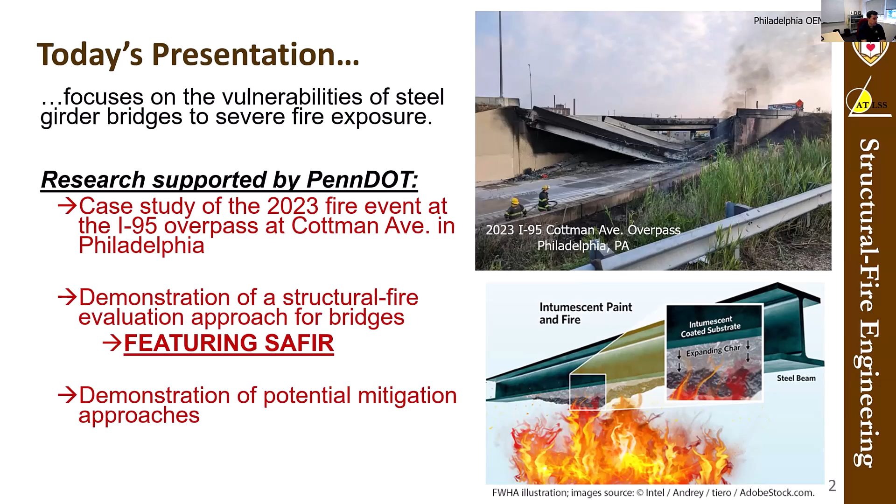So the presentation, we're going to focus on steel girder bridges under severe fire exposure. This work has been supported by PennDOT and features a lot of SAFIR. We're always very appreciative of the capabilities that SAFIR can provide us with doing these analyses, and we've been coupling that with some of our own fire modeling capabilities and calculations, looking in particular at potential mitigation for how we can make it better under these kinds of fires.

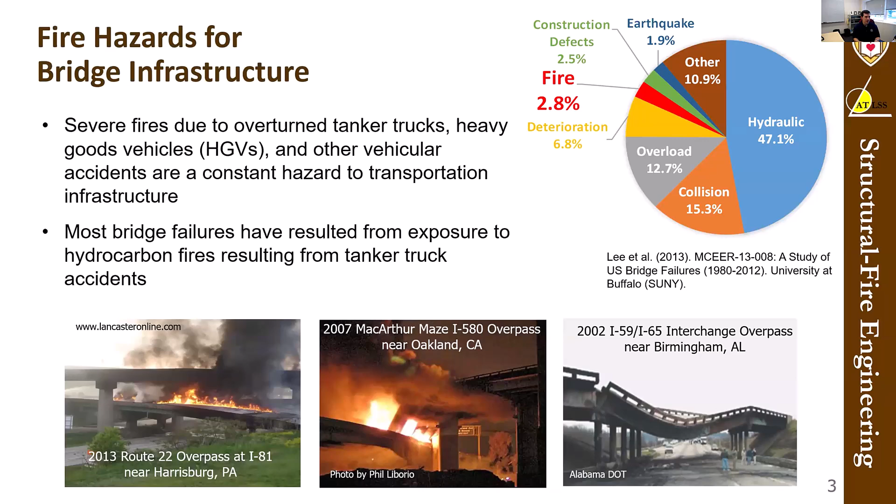Fires for bridges has become an increasing area of concern. The U.S. Federal Highway Administration has been starting to fund work in this area. There's not a whole lot of guidance currently out there in terms of AASHTO or the state DOTs, but fire, even though it's a small sliver in red right there, makes bridges fail on an annualized basis comparable to construction defects and earthquakes. We do a lot more in terms of inspection and design for both of those, and that's a relatively small percentage, but it's a high consequence event. Hydraulic, collision, overload are obviously much bigger, but fire is comparable to some of the other ones that we spend a lot more time on. So entities like PennDOT have become a lot more concerned as it's been happening more and more.

So the I-95 Cottman Avenue bridge in Philadelphia is just over 100 feet in span. The clearance is just over 14.5 feet, so a relatively low clearance bridge. It was only 12 years old at the time of the event last year. It was subjected to a tanker truck fire, the truck was carrying an estimated 8,500 gallons of gasoline. The bridge failed in just a little over 10 minutes due to the extreme exposure, and then the fire continued for about an hour before they got it under control.

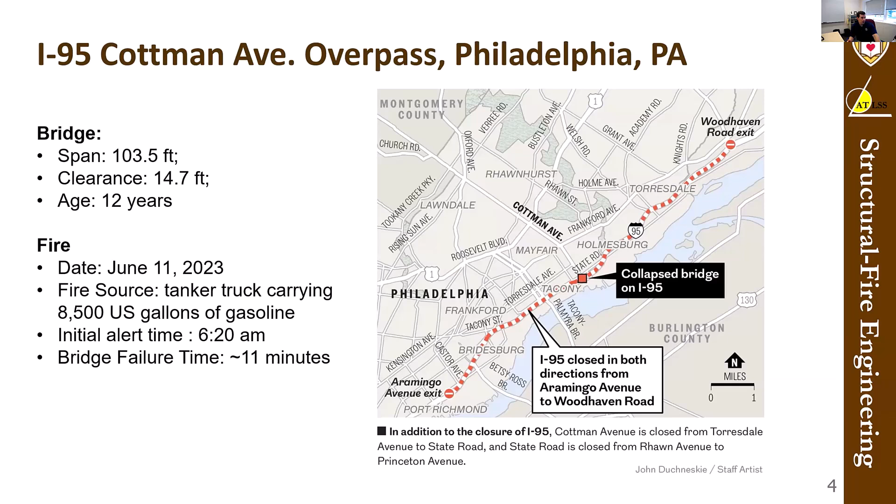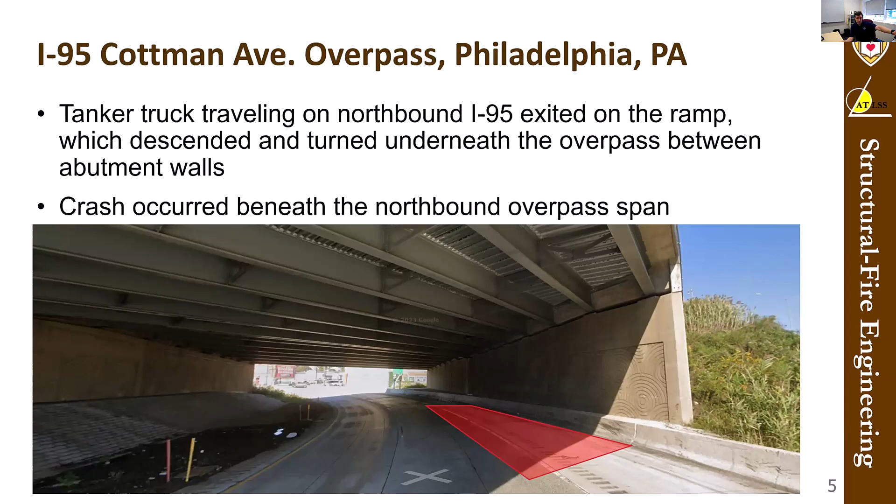So we have an image here showing approximately where the truck crashed. The truck was exiting I-95 and descending down an off-ramp, and that off-ramp curves and goes underneath the overpass to right here, where the driver lost control and struck the abutment wall. The truck overturned, and due to the crash, right underneath the northbound span, that's where the fire ignited. The southbound span was adjacent to this. Northbound collapsed, southbound did not, as you can see here. But southbound was sagging and damaged enough where they ended up demolishing both spans anyway.

The estimated heat release rate for this kind of truck fire would be approximately 300 megawatts. That's a number that's been established by the National Fire Protection Association, available in their guidance. It's a relatively typical steel girder highway overpass, so this was not a design that had a lot of uniqueness or uncommon pieces to it. This was a very straightforward design in the PennDOT inventory, and they were kind enough to provide us with all the drawings so we could do all the appropriate modeling of the sections and the slab and everything else.

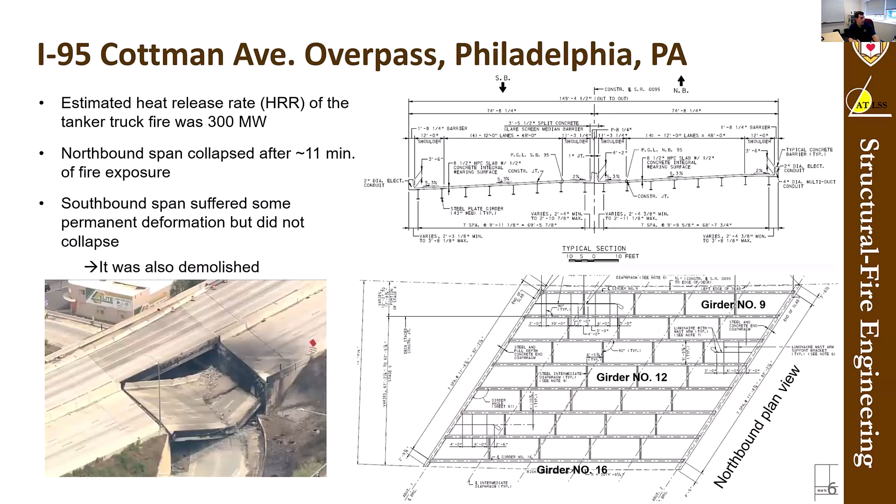So where do you get started with these bridge fire projects?

Chapter 6 in NFPA 502 has some guidance, but the really big thing right away is that it applies to bridges with spans over 300 feet, to support firefighter accessibility, minimize economic impact, and mitigate structural damage. Something like a cable stay bridge, like the Cuomo Bridge, falls into that category. These more signature structures fall into that category, but the provisions in NFPA 502 are not necessarily required for spans that are less than that.

Most of the bridges that have been adversely impacted, that we showed earlier, are mostly just typical overpasses in high traffic areas with high levels of vulnerability.

So the engineering analysis—if you were to apply the NFPA 502 requirements, an engineering analysis is needed to determine if the bridge could withstand a fire without collapsing. It gives you some guidance depending on what the bridge is going over for what kind of hazard you should use, but the engineering analysis itself is not specified.

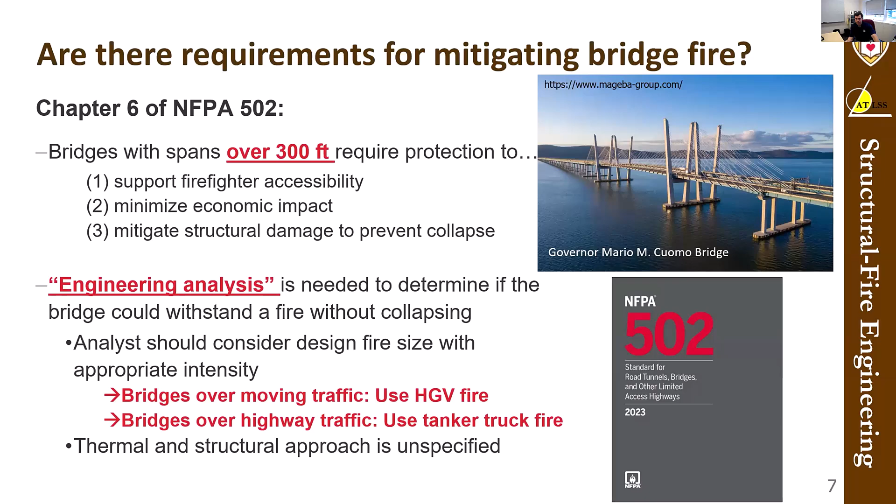So we've been using SAFIR in combination with our fire modeling tools to do this type of work for PennDOT, using performance-based structural fire engineering: fire model, heat transfer model, structural model. With SAFIR featured prominently in the heat transfer and structural models, we've been trying to synthesize these approaches that take reasonable representations of fire, bring the heat to the structure, and then see what the structural response is—so PennDOT can begin to make decisions about what kind of thermal and structural vulnerability we have, how to select products to protect these assets, and what the potential outcome is.

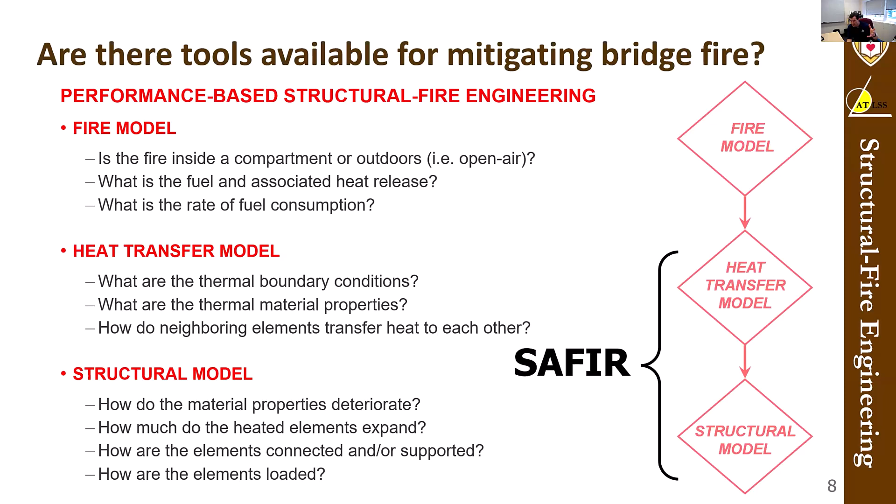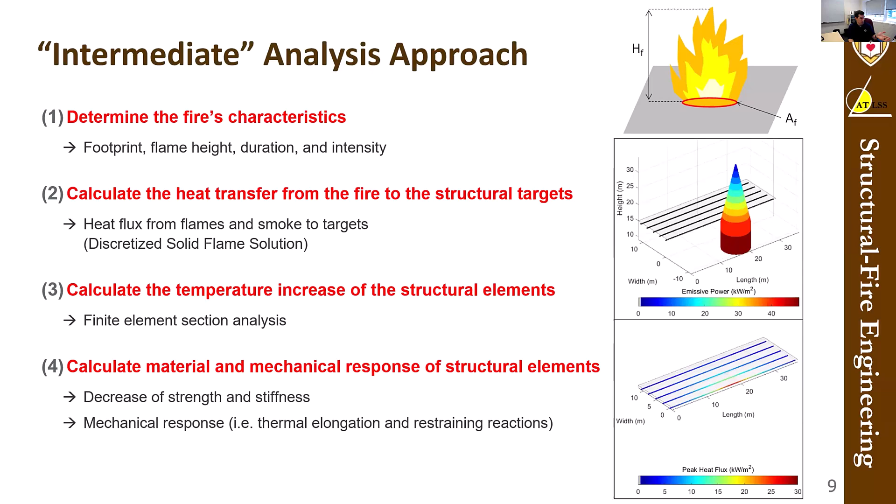Even if we apply passive protection, what should we be expecting from a damage perspective? The approach we've been applying is somewhat intermediate—that's the term PennDOT has liked. We're not using the highest order of computational approaches, but we're also not using single calculation spreadsheets. It's trying to go in the middle between certain levels of complexity to determine the fire characteristics, calculate the heat transfer from the fire to the structural targets, calculate the temperature increase of those elements, and then calculate material and mechanical response of the structure.

So we'll go through each of those steps as it applies to I-95. The fire characteristics: establishing that this was a tanker truck, we have an established heat release rate based on NFPA 502. But then we also look at the footprint of the fire, how long it takes to burn away the fuel, how much of that 8,500 gallons would be available. You'll have some runoff, some absorption—what would be a reasonable approximation to determine the length of time. You get a heat release rate time history from all of that, and also fire geometry, particularly the flame height and the breadth of the fire.

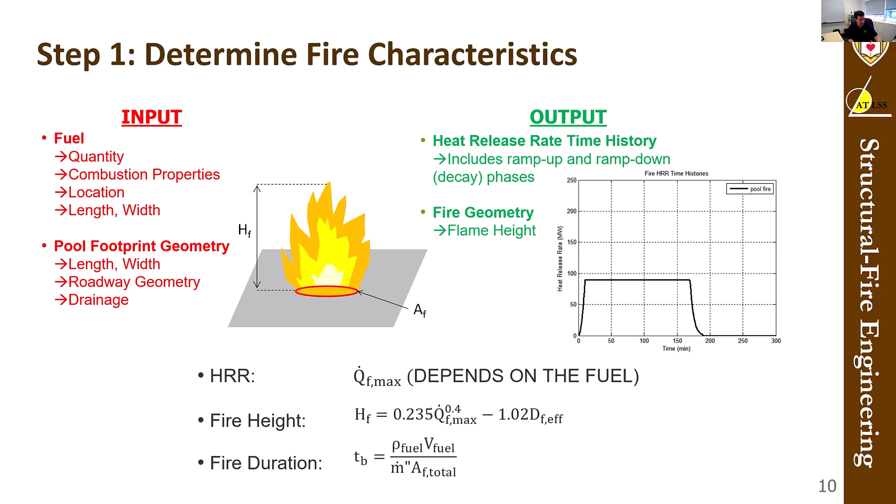For a hydrocarbon pool fire, there are established equations for determining flame heights and heat release rates based on the fuel. For solid fuel fires, we've done a few using inventory methods for PennDOT as well—that's been in response to other events where bridges collapsed due to burning storage materials underneath the bridge. For vehicular fires, instead of doing a hydrocarbon pool calculation, you can revert to the heat release rate tables from NFPA, and use those as the basis for calculating flame heights based on the footprint you have.

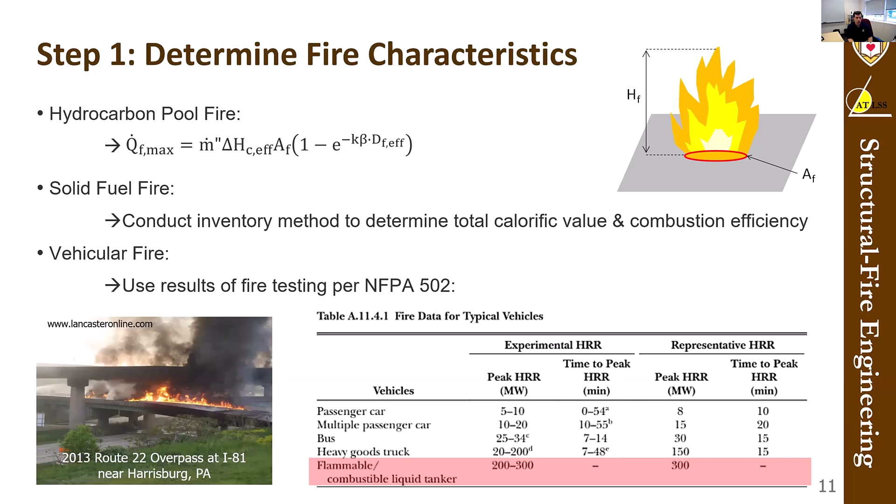With those things in mind—to establish how long the fire would burn, how high the flames would go, and the overall breadth of exposure—we then use a model we've coined the MDSF, or the Modified Discretized Solid Flame model. We've progressed through several iterations, and this is really the second edition. We used it on the MacArthur Maze fire, which happened more than 15 years ago in Oakland, California.

We've used this looking at the Harrisburg fire incident from 2013, and then also the I-85 in Atlanta from several years ago as well.

It basically takes the solid flame, the fire object, and discretizes its surfaces into tiles, and you can begin to divide them up into visible flame and smoke obscured elements. You have the flames underneath, and then also a luminous zone, which can fully have visibility of the structural objects. Then the smoke cone sits on top, and that helps shield some of the emissivity coming off of the flame.

Then you can calculate the total heat flux, the contribution of all tiles that can see a target, on any object adjacent to the fire. If the bridge ends up confining the fire and smashing its top, you can then begin to spread it out.

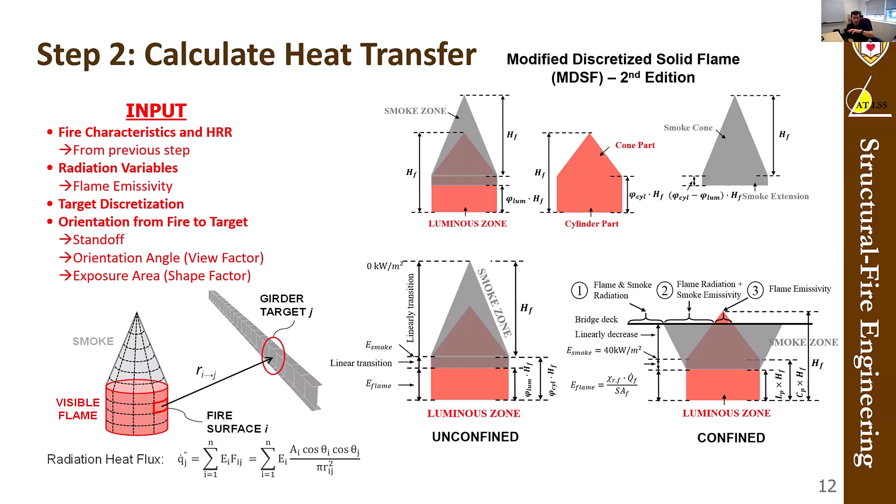So we do both when we look at particular types of exposure. If we have a fire — again, this was not the case for I-95 — but if it's just adjacent to the bridge, the fire goes up and you have tapering down of emissive power as you go higher in the smoke cone.

We validated this model against numerous experiments, especially for hydrocarbon pool fires, and then also using FDS models for further verification. You get a spatial distribution of the heat flux exposure and the time history, so for how long this would take to burn out.

If you switch over to confined fires, the smoke and flames smash into the underside and spread out, and then you see a much more severe distribution of peak heat fluxes, depending on how close you are — your proximity to the fire and the clearance.

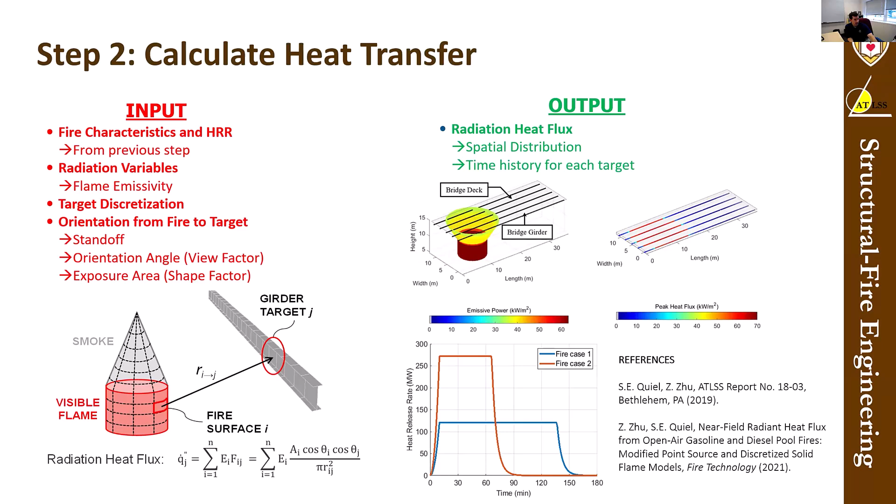So for I-95, the truck hit the abutment wall on the north side of that off ramp underneath the northbound span, and then caught fire, with a heat release rate of 300 megawatts.

So this fire, the way the MDSF is working, is severely smashed underneath because that's going to have a high flame height, approximately a 50-foot length. We use an elliptical shape rather than circular, and we have some strategies for how that creates the cone shapes — we can kind of mold it to get more of a lengthwise fire.

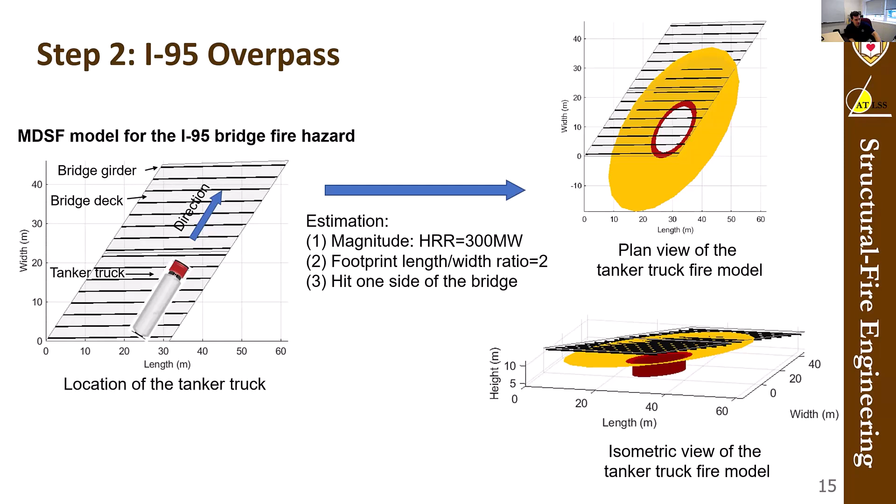Looking at the isometric view for how this tapers around with the smoke, those edges that are smashed kind of go into the abutment wall or outside the bridge. It's assuming those are going to be escaping vertically. So the entire shape is smashed, if any of it is smashed.

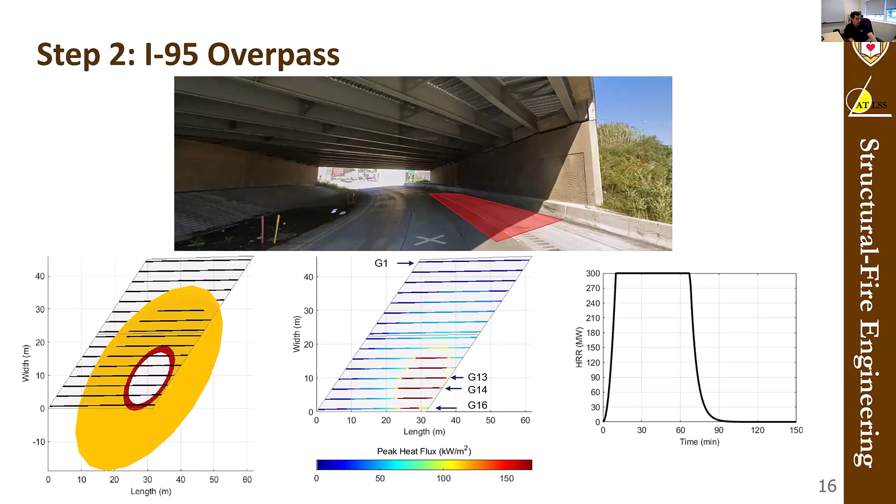Looking at the heat flux distribution underneath the fire, we can see the highest levels of intensity. The engulfed values get up to about 170 kilowatts per meter squared. That's consistent with the high end of the ASTM E1529 and also experiments. Then the time history goes just a little bit past an hour for how it burns out.

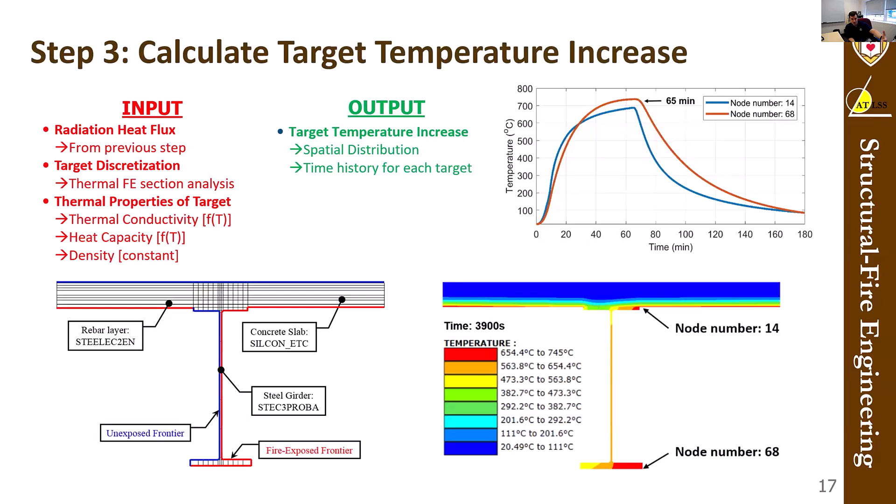Taking those heat fluxes, we can then apply it to our cross sections in SAFIR to figure out how much this heats up, so we can come up with target temperature increases for these fiber sections, depending on their boundary conditions and exposures, and get their time histories.

Northbound, they were inundated, so we had all sides on the underside of the structure that were heated, and we did it in length increments, about 3-foot increments going across the bridge, so we do get the differential heating across the length. Southbound, 2 sides were heated because it was getting side swiped — again, it was discretized along the length to see what the residual damage was there.

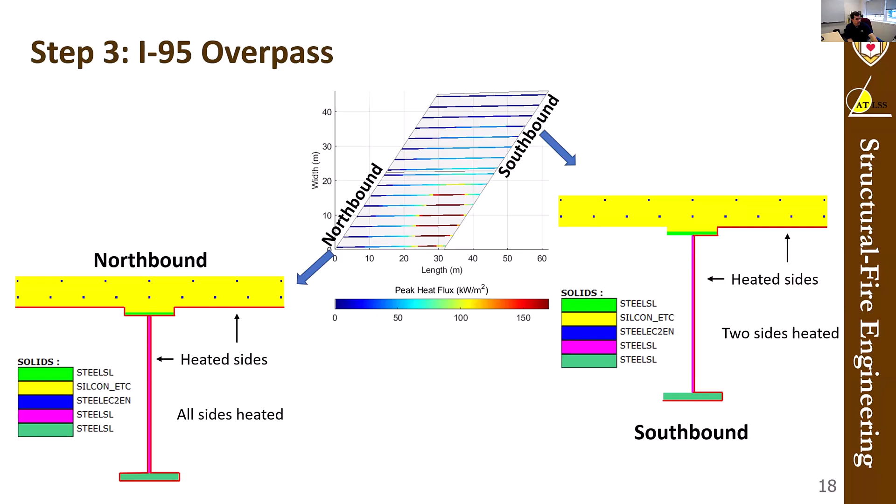Calculating the structural response, if we have the boundary conditions and the loading, which again, based on information we got from PennDOT, we can estimate what the base loading was. We typically are just using dead load plus 30% of just the uniform lane live loads. Very low live loads, it's not a whole lot driving across the bridge in these situations. So we've done 1.0 times dead load, a more minimal amount of loading that doesn't consider a whole lot of live loading.

And then taking our cross sections as thermal input and putting it into the models. Again, these boundary conditions for how the ends are restrained, this was done in consultation with PennDOT and their drawings. And we can get then deflection time histories and eventual damage or estimates of collapse.

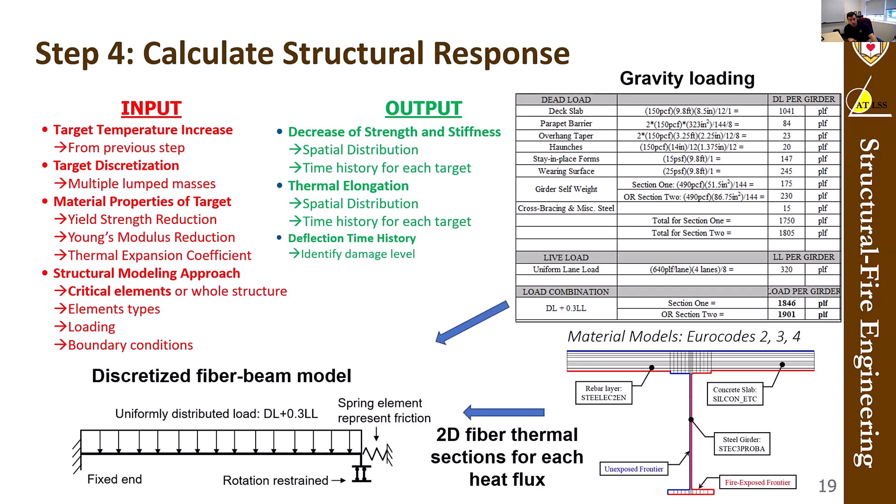They're analyzed individually. So the decision was made, we had proposed to PennDOT that we could do something where we had shell connectivity between the girders. Some preliminary calculations that we were performing indicated that it really wasn't going to change the results that much in their favor. And so we did them as individual analyses.

And at 11.5 minutes, the first girder collapses. Very soon thereafter, you get another 4 that collapse. And so based on where the fire was and which girders go first, and then what the shape was in terms of eventual failure, we had a lot of consistency in terms of what we were predicting.

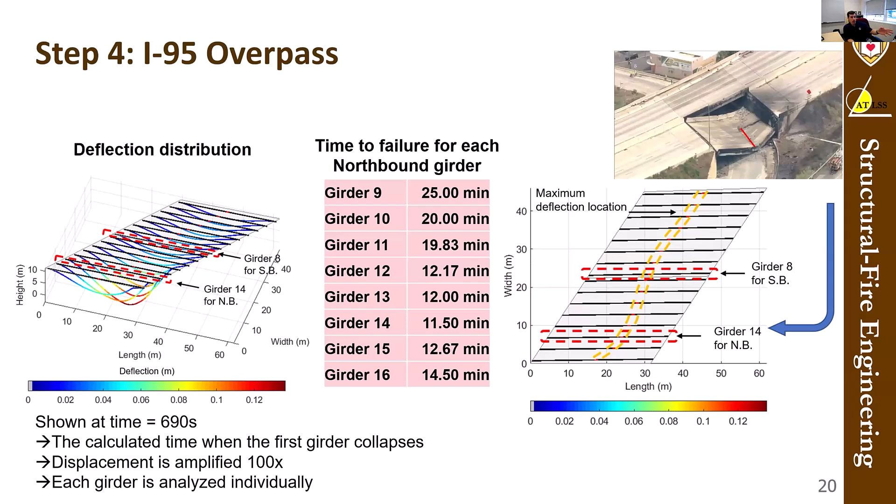And then also, not only just with northbound, but also with southbound, where for southbound, it should not have collapsed. And so if we look at the worst girder on southbound, we were sagging a lot. We got a decent amount of deflection.

It was also evident in cell phone videos. There was actually one car that drove across southbound during the fire event, and you can see the car basically go down and then up as their cell phone video was rolling.

And so we end up with a level of residual damage. And we've come up with a classification system for PennDOT that they've liked, which has taken some of these serviceability limits in AASHTO and then scaled with the residual effects that you get post-fire, going from superficial, where it's very small, you can potentially reuse the bridge, to moderate, a little larger amount, requiring more repair, possible replacement.

Heavy post-fire, replacement is most likely going to be required. Hazardous, the probability of collapse is increasing, replacement's going to be definitely required, and then collapse, you basically get to runaway deflections sometime during the analysis, which is what we saw with northbound.

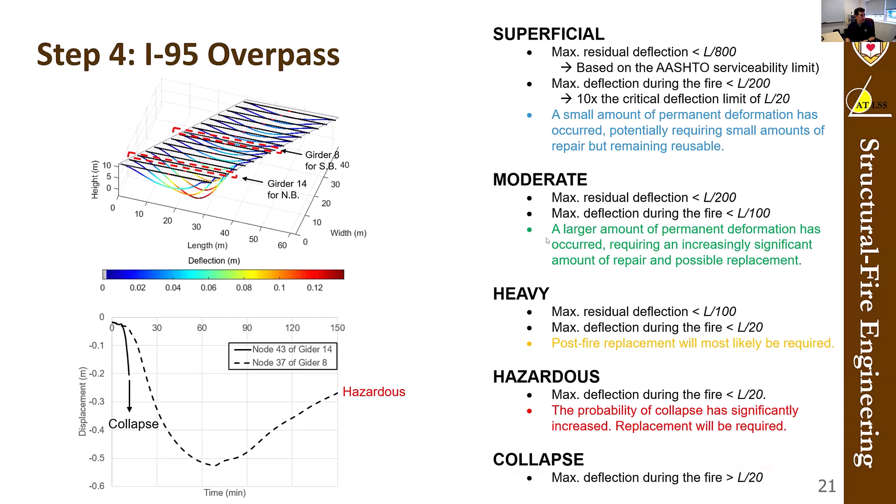And so PennDOT was satisfied with the way these calculations were predicting what happened in the event and the collapse that was observed. But then they were interested in how would this be able to be improved? What kind of protection could we provide for it passively, and it would have to be corrosion resistant, weather resistant, relatively lightweight, cost effective, and can't inhibit routine inspection.

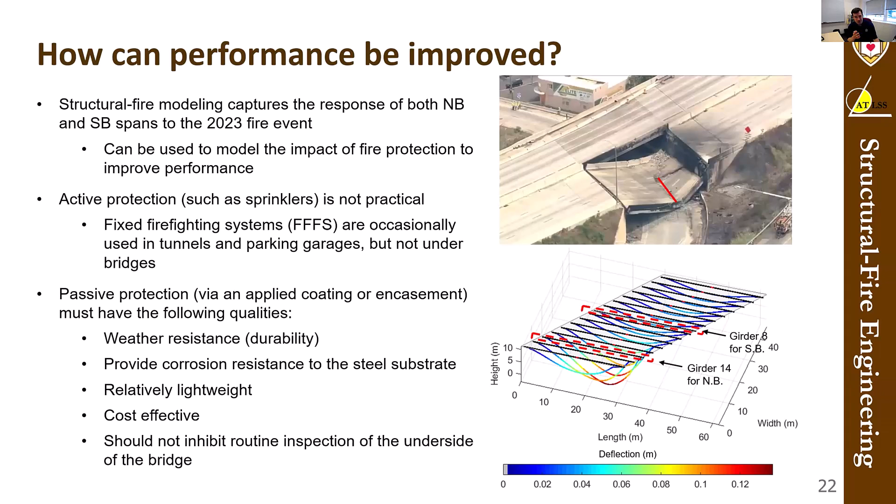And so these are things that they're beginning to explore. This is going to be a subsequent project. And so obviously things like SFRM and gypsum boards, in this environment aren't going to work. But the good thing about these materials, we have a lot of data in terms of how to model them in SAFIR.

Intumescence, this is more of an ideal product. It's a little more costly. And also the thermal material properties are still being developed in terms of what kind of performance you would expect.

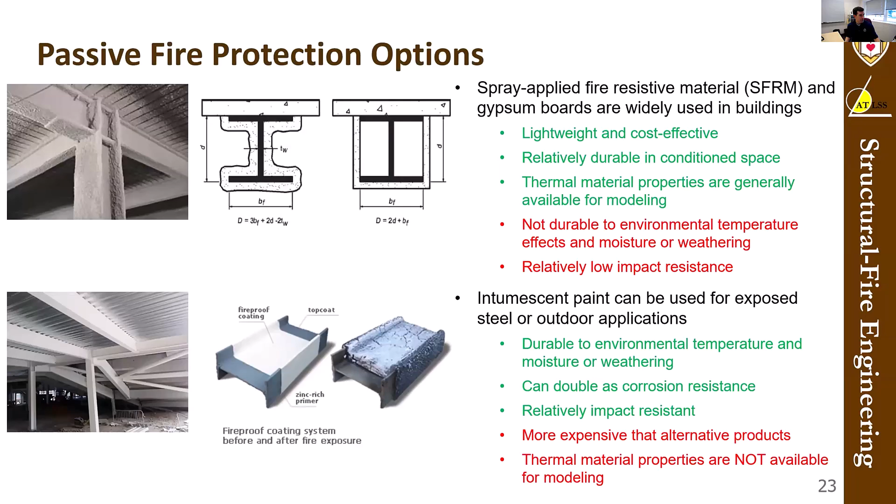So what we end up doing is performing somewhat of a virtual fire test for them, and using SFRM as a stand-in. So if we can develop what kind of hourly rating would be needed per the ASTM E1529 or even the E119 curve - E119 is for buildings, but a lot of products are rated using that curve - how can we then come up with thermal performance on this bridge, structural performance, establish relative quantities of fire protection to meet an hourly rating with a virtual test, and then compare that to what the actual performance of the bridge was.

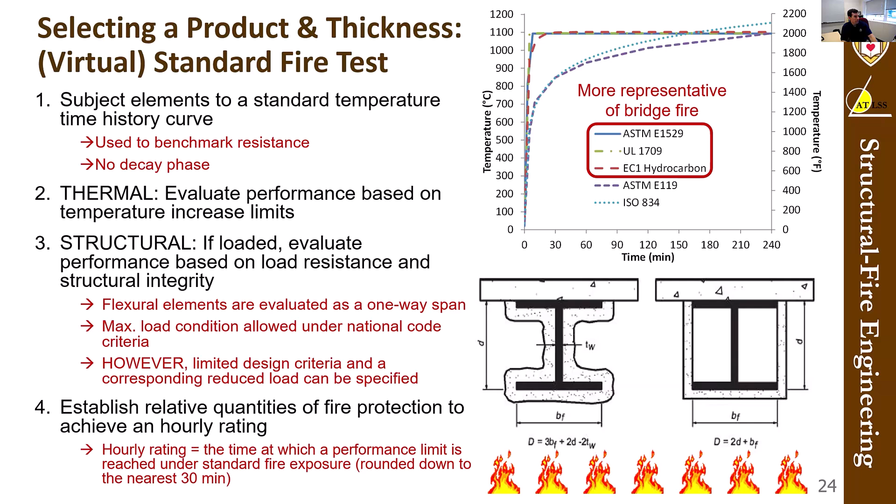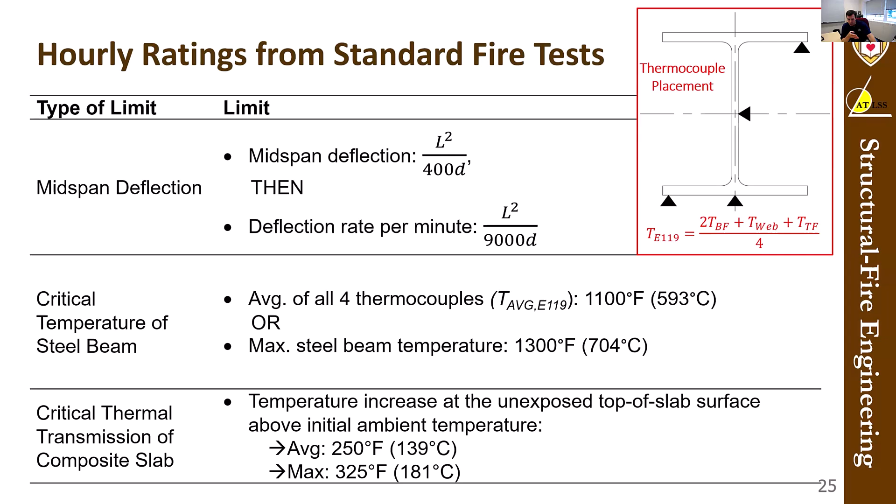Something they've been really interested in is taking these hourly rating metrics - mid-span deflections, critical temperatures of the steel beam, thermal transmission through the slabs - all out of the E119 criteria. What these metrics are in a testing environment, but then how do we make them talk to a performance-based structural fire design?

Can we use calculations to do the virtual standard fire test to figure out what hourly ratings of a product correspond to each severity, and then from a performance basis, go back to the actual structure and the actual fires with those rated protection levels and figure out what is the expected measure of performance so that they can go buy a product. So that's one of the things they're very concerned about - how do we actually select what is going to help us and what can we expect it to do.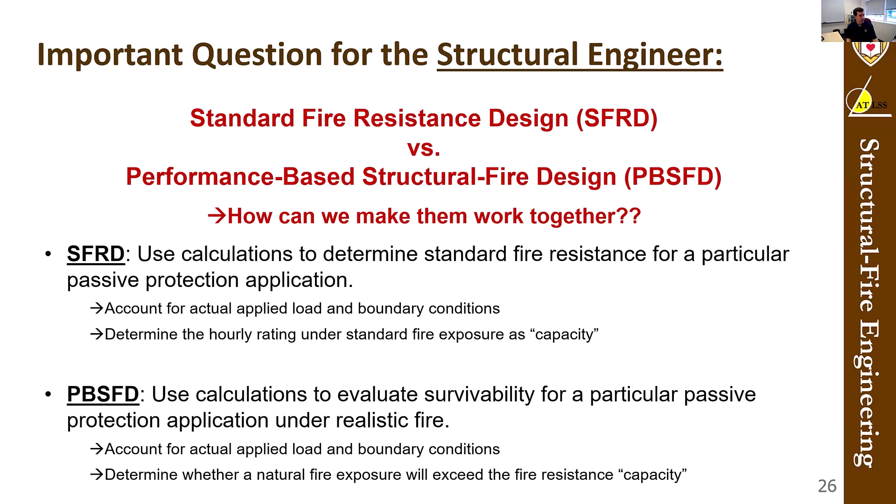The modeling approach we did was using SFRM as a stand-in, so we have those material properties. We used some published results produced, led by Negar Khorasani at University of Buffalo, using their median curves for thermal conductivity, specific heat, density - plugged those in, did virtual standard fire tests for the cross sections we have.

So what hourly ratings could we derive with that for certain levels of protection? Take those levels of protection, subject them to the 2023 event, and then look at performance versus hourly rating.

What would you get? So with that, looking at a couple of our cross sections here in SAFIR, this is for the hydrocarbon exposure 1529. Initially using thermal, so maximum and average - maximum temperature for these types of cross sections is typically governing.

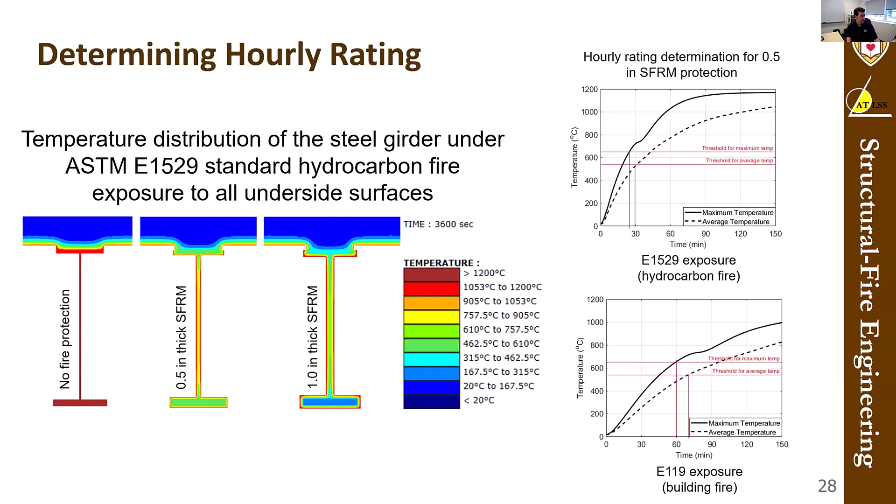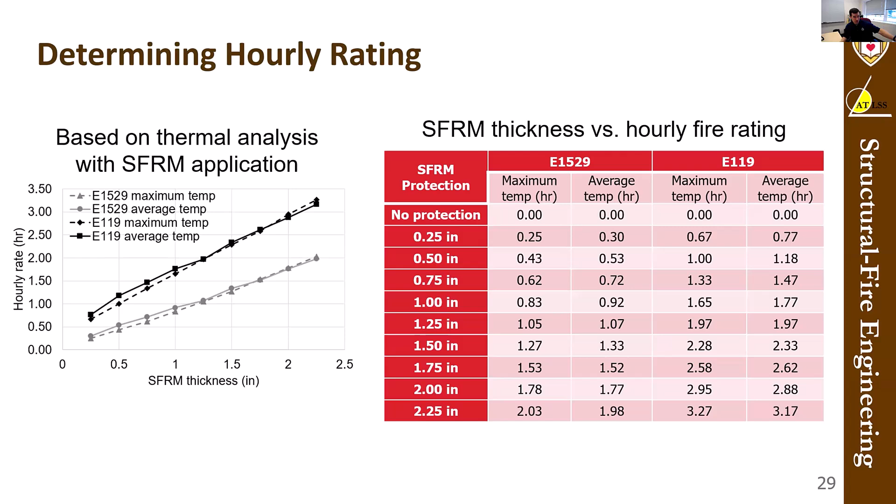So determining a thermally rated hourly selection - hydrocarbon and building fire, because E119 is how a lot of the vendors are rating their products. We're doing both and looking at, for hourly rating versus SFRM thickness, what would you get?

Then also going back and doing the virtual standard fire test on the structure itself, to compare deflection versus the governing temperature criteria. We saw they're actually relatively consistent.

Especially for these levels of loading - again, it's going to be load dependent, we've done some other work on that. So what kind of hourly rating would you get on a deflection basis versus thermally?

Thermally is nice because, again, it makes it more flexible - you can do it for more types of scenarios.

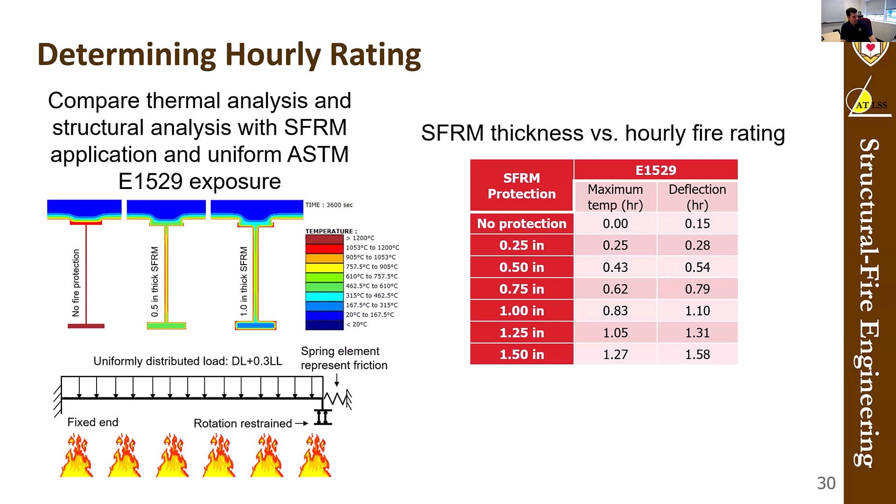But then taking those results, each of those protection increments, and subjecting them to the actual event - what happens? Does it collapse, heavy damage, hazardous damage, moderate? And PennDOT really is interested in getting all the way down to superficial.

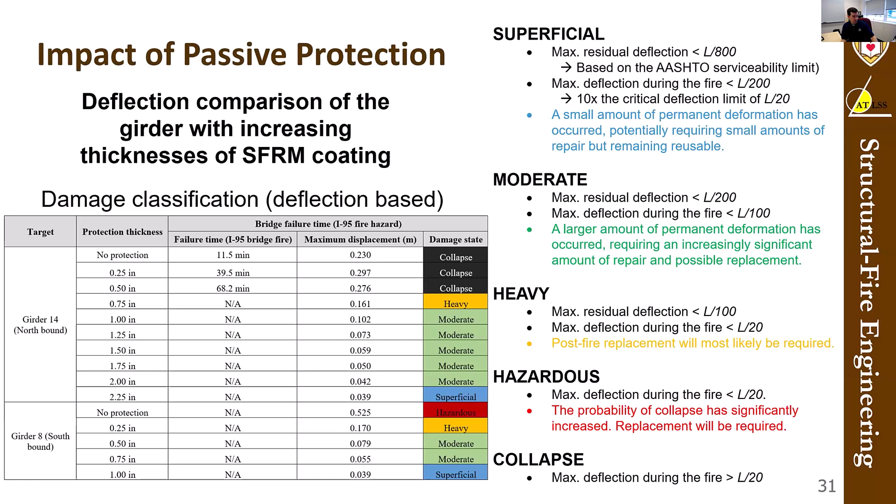If they're going to put fire protection and spend the money, can we reopen the bridge? That becomes the chief question. And so we can do correlations

with different rating types for stepping down - if we apply 1 hour of rating per this curve, this is the expected measure of response that you would get in response to the actual event, for the actual structure and loading. So these types of tables have proven very useful in their discussions with some of the vendors they've had thus far.

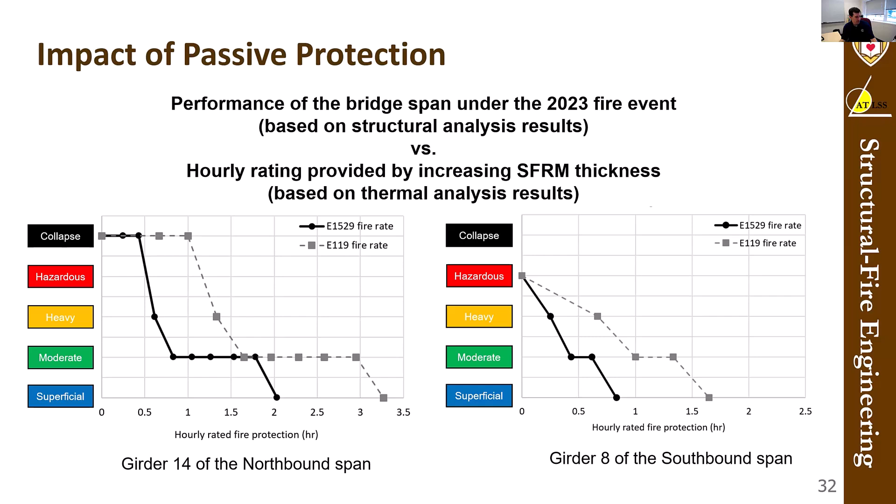But what they're interested in more, from the conclusions of this project, is then using these modeling methods with intumescent products. But first, we're going to be doing some testing. So they want to explore what kind of residual damage would be expected.

Obviously it's going to slow down the temperature growth, it's going to provide some benefit. But if they have to demolish it anyway - they had to take southbound down in addition to northbound, which totally collapsed. Both bridges were a total loss.

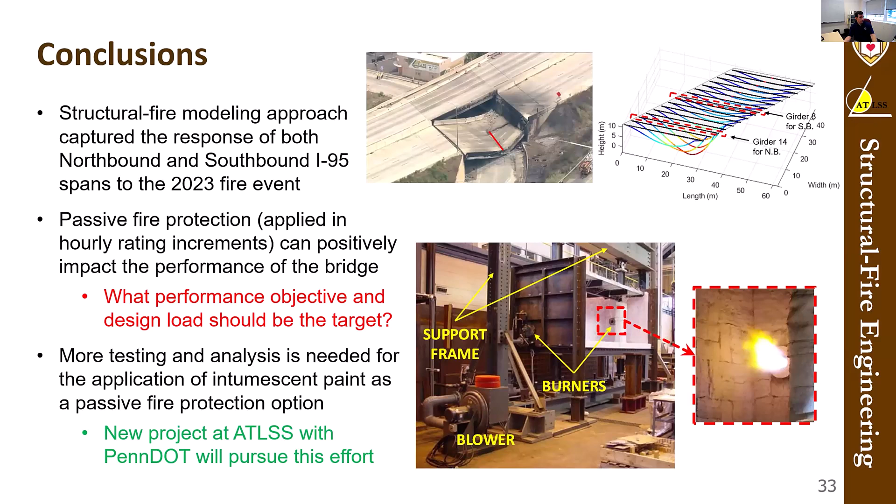So they want to know, from a relative sense, what would actually provide tangible benefit to meet a given performance objective. And that's going to be leading to new research that we're going to be doing in the next 2 years here at Lehigh.

I know it was a lot in 20 minutes, but thank you again for your attendance today. This is a great event - I'm excited to see all the other presentations and the things being done with SAFIR around the world. And I'd be happy to answer any questions.